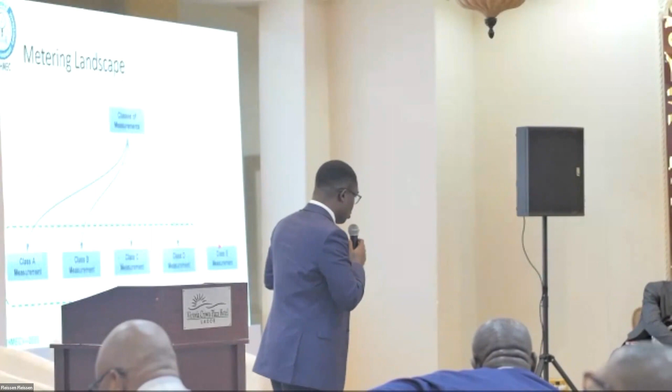Because the commission chief executive, when he goes out to meet a global audience, he will begin to talk about how we are reducing flare. But again, you also need to talk about the quality.

Again, at the presidency, maybe at the SGF, or we have our minister spoke earlier - okay, what is the quality? Because you have to talk about decarbonization. But again, what is the quality of emission that we are talking about?

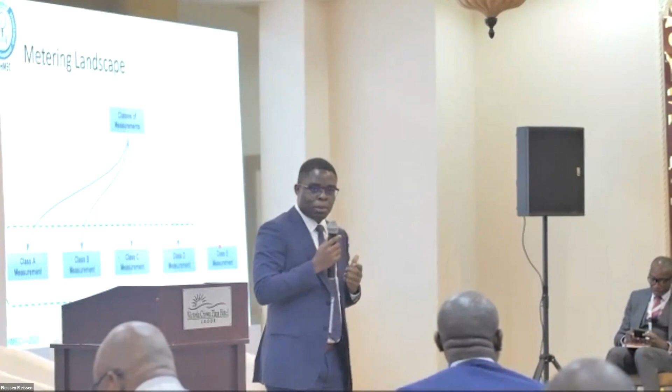So that when you are talking at the global stage, you'll be able to tell the people that look, we are taking accurate measurement and analysis of the flare that we measure, and this is the quality. Don't come and tell us we are not doing the right thing. We should have a voice to speak, but with data.

Next, please. Okay, this is a typical process flow diagram, and it shows the different measurement points. And this is for a gas condensate well, as an example.

The thing is that we have wellhead measurement, and that is multi-phase, in this case wet gas measurement. And then we have process measurement, process meters. Of course, down after stabilization and removal of water, dehydration and everything, you now have fiscal measurement, because you have

the quality of gas that is needed for export or for local consumption, what we call domestic gas, then that goes to power plant and everything. You must meet the quality, the specification. So next please, I will be fast.

But this is my experience. I've done flow measurement from wellhead to custody transfer, allocation, fiscal metering. So the question - there are different technologies when it comes to wellhead metering. But again, why wellhead metering?

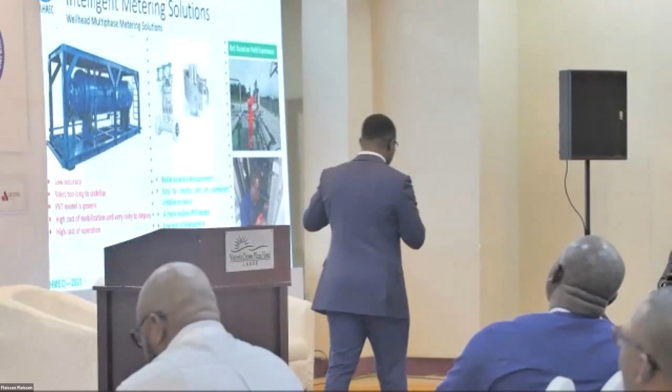Because we want to have so much data, and this is where digitization is, where we are driving digitization. We used to have separators for well testing, but it's very expensive, risky. It doesn't give you the right information about your well, the health of your well, or the productivity index at the end.

So, but you have an inline meter that gives you the three-phase measurement - gas, condensate, and water. So at every point in time, you have good information about the flow regimes, or you can predict, or you are seeing, because you have the trends that show how your gas is being produced. And at a certain point, okay, water is beginning to come into your well bore.

And then you should be able to plan for well workover operations and everything. So you have pretty good information and data about your well performance, as well as predict your reservoir depletion.

So in general, this is - I just want you to please press it again. Yeah, it should be a video.

Just picture that: under controlled environment, you will have this type of behavior. When you go to the field, what is happening at high pressure? That is why instrumentation is very necessary - smart instrumentation, a reliable one - because whatever data you are pulling to form the basis of your digital transformation is as a result of this information at the field. And if it is wrong, whatever you're saying is also wrong, and your reconciliation process is also already wrong.

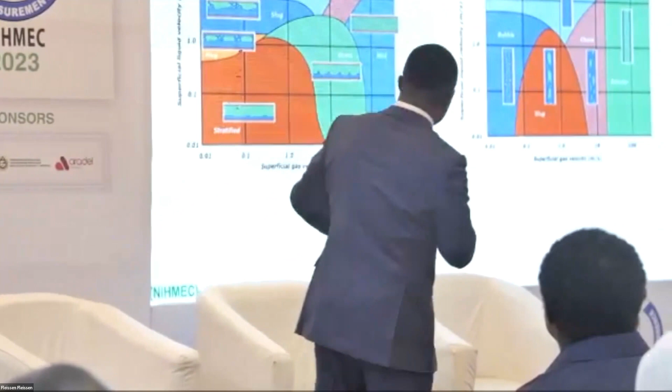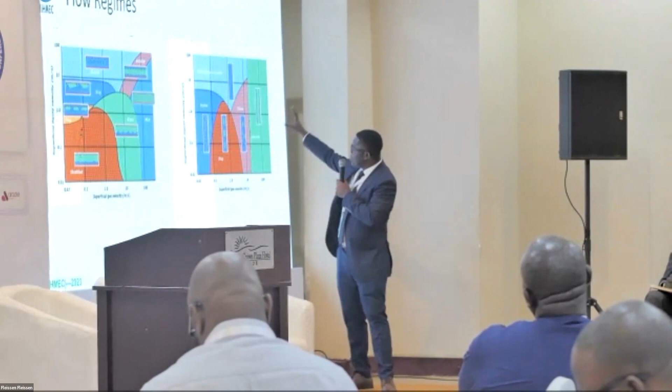Next please. So this is to show you the flow regimes, whether for horizontal and vertical flow environment. The truth of the matter is, for wet gas, you can only operate at this side of the envelope for horizontal, and for vertical you can operate at this side of the envelope. This side is slug flow, meaning either annular or mist flow. For slug flow and downward flow and everything, it is more suitable for traditional multi-phase meters. It is not for wet gas application.

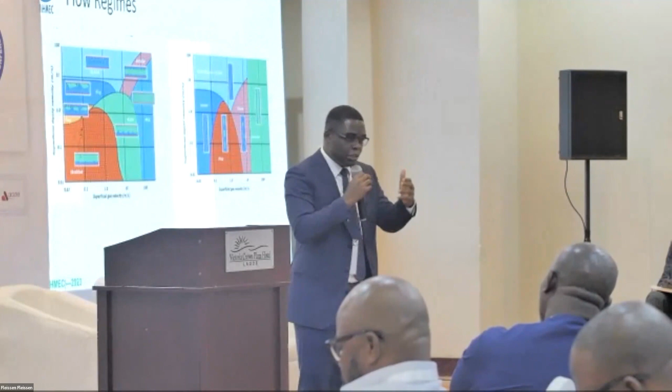As you further go down the production downstream, pressure and temperature variations occur, and then condensate comes out of the gas phase a little. That should form the basis of your mass balancing with accurate measurement. Next please, I'll be very fast.

Next. Generally, studies have been helping to the extent that we now know, if you're talking about wet gas metering, to properly unlock gas resources in the country, we have to look at it in 3 different types. That is based on an equation called the Lockhart-Martinelli parameter, and that parameter should at most be equal to 0.3. If it is greater than 0.3, it is a multi-phase flow regime, not for wet gas application.

And this is where regulation comes in. The question is, any multi-phase meter manufacturer can come and tell you, I can do wet gas metering - please, can your multi-phase meter withstand a Lockhart-Martinelli parameter of less than 0.3? If you have less than or equal to 0.02, it's categorized as type 1 because you have a very small amount of liquid.

That is why we talk about all these things process-wise. Sometimes we discuss and some people say, 'my well is dry.' I say, sorry, you don't have a dry well. There's no dry, okay, they say dry gas. I say, sorry, you don't have dry gas wells - it's the degree of wetness. There is still some amount of liquid, so it's still wet. But that affects your accounting processes downstream, and how you are able to take care of this matters a lot.

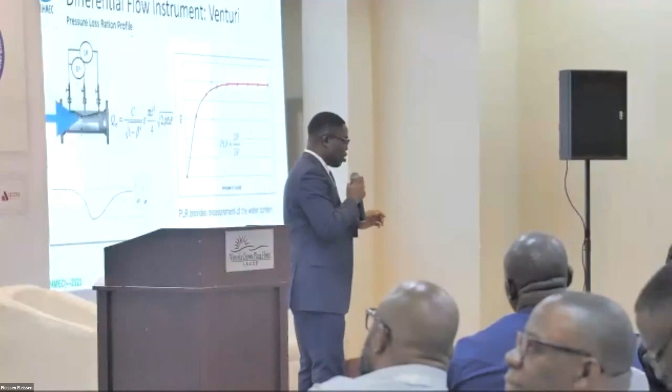So, I won't say what's the best, but there are different technologies. In my experience, it's the Venturi. And that's because a very experienced man called Rick de Leeuw from Shell, who is retired now, did a lot of extensive work using the Venturi to measure wet gas.

And he found, at some point, what we call pressure loss ratio, PLR. That's the differential pressure across a certain length of the Venturi divided by the differential pressure across the Venturi throat. The Venturi is designed such that when the differential pressure comes in at the throat, you have a DP, but when it is recovering, it doesn't recover fully in the pipe until a certain distance.

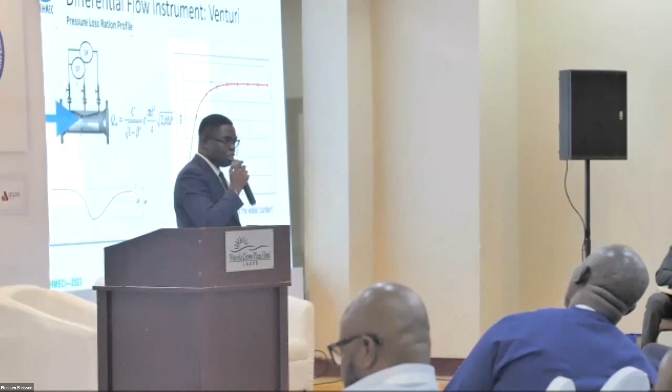So they studied it at different points to the extent that they now have a point where they noticed that the differential pressure across the Venturi, this PLR, will be able to indicate to you the amount of liquid in the flow stream. And that means the density—these are differential pressure flow instruments, same as orifice,

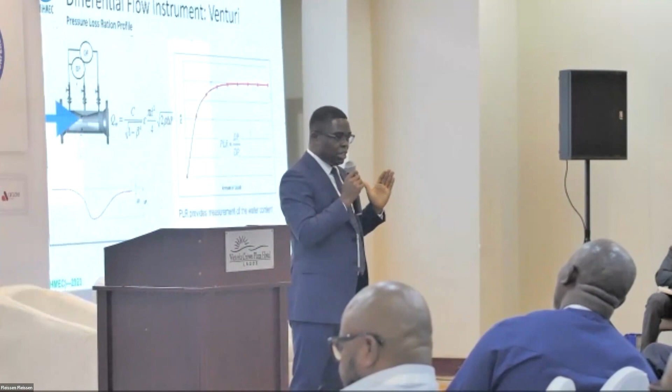but for single phase. So if you begin to load liquid in it, you'll find out that the gas becomes heavier in terms of density. So it means there will be an overreading on the DP because of the weight.

So the same simple differential pressure flow instrument equation is used, but they now have to use the PLR to get an indication of the liquid in the flow stream, so they can use that in the model, the advanced algorithm they've developed, to output the three-phase measurement as accurately as it should be.

So that's why smart instrumentation is key as we are building toward digitization, and it's very key to unlocking the gas resources that we have.

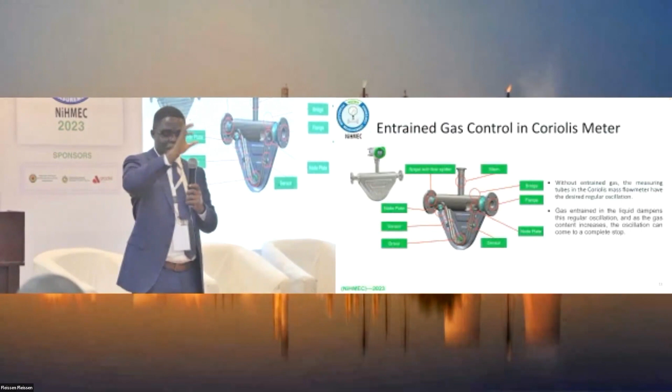Next, I'm going to talk about process measurement. In the process flow diagram we saw earlier, there are places where you have a slug catcher because you still have to stabilize a little bit of your well stream. In your slug catcher, you have your gas phase, gas leg, and then your liquid leg.

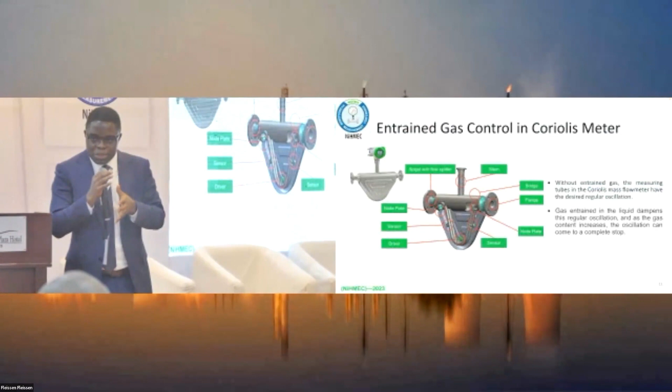Then you have to measure that volume too, because you're doing mass balancing, and this is where process mass balancing comes in. It's very important before you go for reconciliation, as I mentioned. In your liquid leg, it's condensate you have, and condensate is also a bit lighter compared to crude oil, so the density is also light.

But because you have a slug catcher, the retention time is very small for gas—it comes in, it goes out. If it's liquid, the retention time could be like 90 to 120 seconds based on design, and it can stay for a little while, so there will be a little bit of separation or stabilization that you'll enjoy.

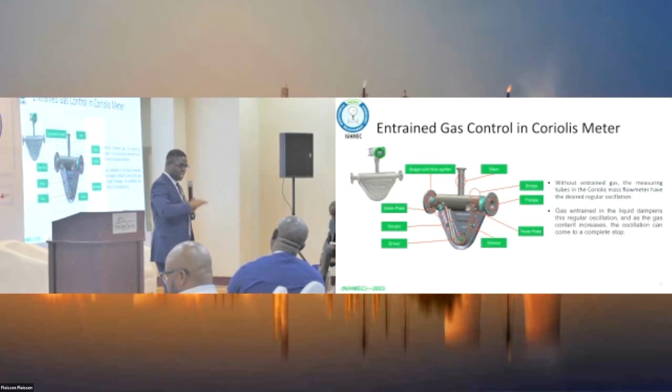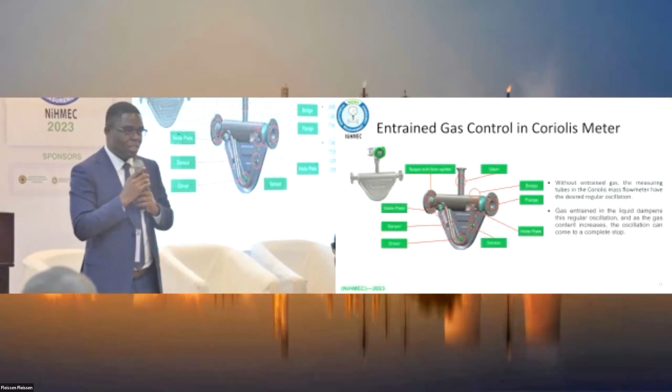But for gas, that's why a test separator is not really suitable for gas well testing—it comes in, there's no stabilization, it goes out, and sometimes it comes with bubbles in the separator, in the gas leg or liquid leg, but you still have to measure it. What technology are you using? Most efficient is Coriolis. The question is whether gas bubbles or entrained gas affects the measurement of Coriolis. But advanced research has also improved measurement using Coriolis meters, and that's why it's very important—what we're talking about today is having smart instrumentation for digital improvement.

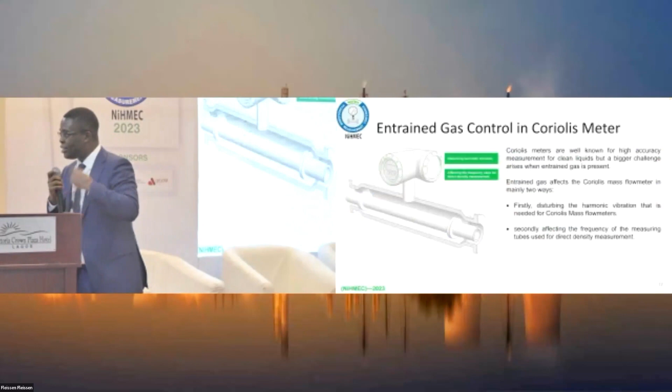This is the conventional Coriolis meter technology, where you have your sensor and then you have the driver. The sensor and the driver are connected in one block directly for a traditional Coriolis flow meter.

So whatever the phase shift or the frequency of movement is, it translates directly into the driver. If gas bubbles come and distort the frequency and oscillation, it feeds directly into the driver, and that gives the measurement output of a Coriolis flow meter wrong when there is entrained gas.

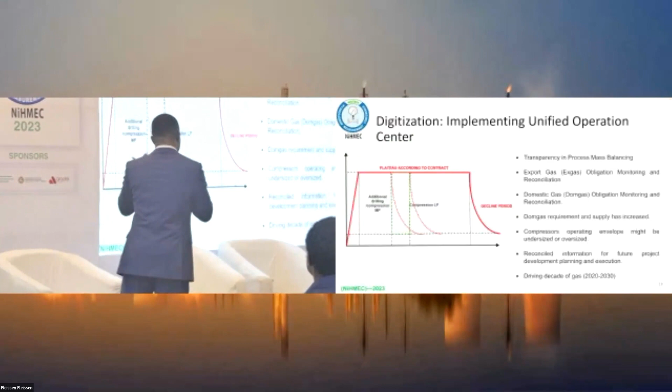Now, in this case, you find out that you have the transmitter digitally connected on a digital processor.

So what happens is that the conditioning of that phase shift, of that impairment because of entrained gas, is processed and dampened in the electronics, and is not transmitted to the driver. So the resolution happens internally in the transmitter before it goes further. I would have explained it much better, but because of time.

So it's not directly coupled to the driver.

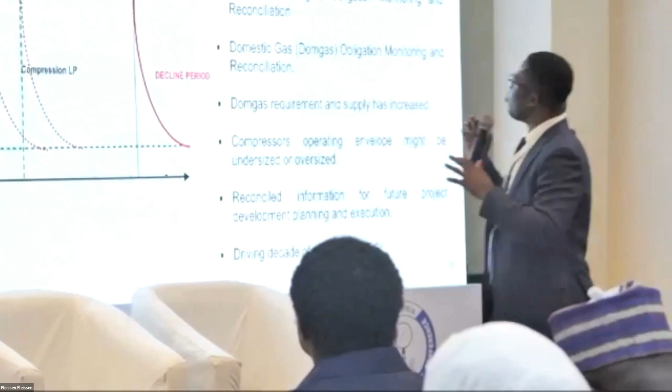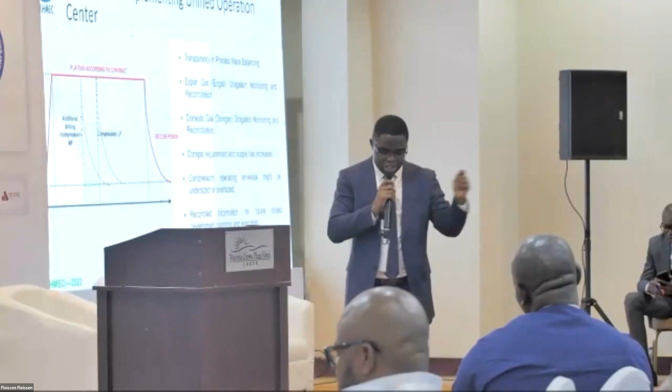So digitization, why do we need to implement that? I want you to look at this. This is a typical production envelope from startup to when you're at plateau. But the thing is, we need to understand that every gas production is tied to a contract. Either you are supplying to export or you are meeting your domestic obligation. It then means that the compressor you size should be able to handle that. The question is, for how long?

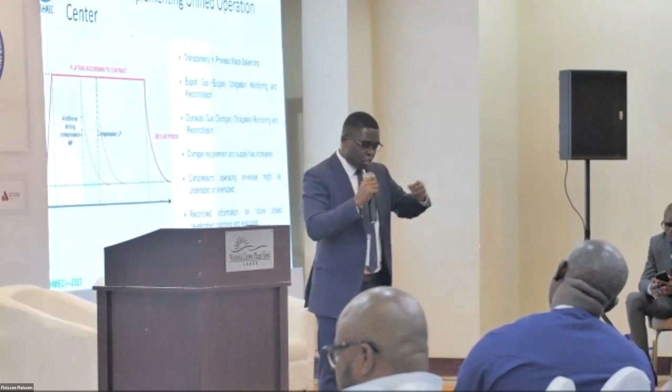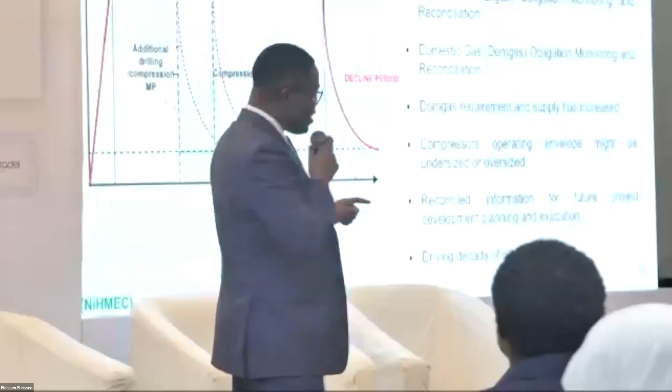Because your choke opening at the wellhead is dependent on the demand from your downstream customers. So if the demand is high, you also have to open your choke because you need to meet the contractual obligation. It means that for gas wells, the plateau is very short. And the commission chief executive spoke about those who are not able to meet their field development, they will be delicensed and reissued to others.

The question now is, what is stopping you from producing that? Because some of them want to discover other gas fields so that they will be able to have enough compression capacity. So if you have one, two, three wells, you might not want to put in a compressor because it's not economical for you. But again, we need to discuss how we can now do fiscal allocation from the wellhead to maybe a third party.

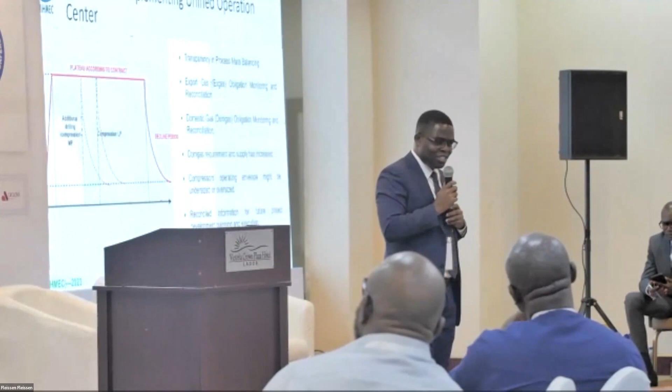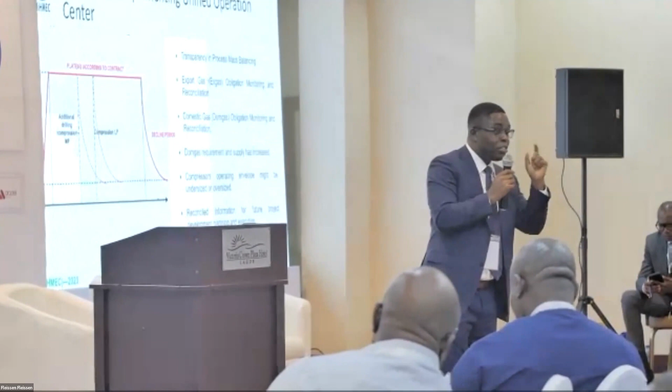You have to deplete that gas well because we want to harness our gas resources. That means you can actually use a multi-phase meter or wet gas meter to produce at the wellhead and send to a third-party processing facility at an agreed accuracy rate, where revenue is tied to the gas phase, not the condensate phase or the water, because those are small. So this is the question.

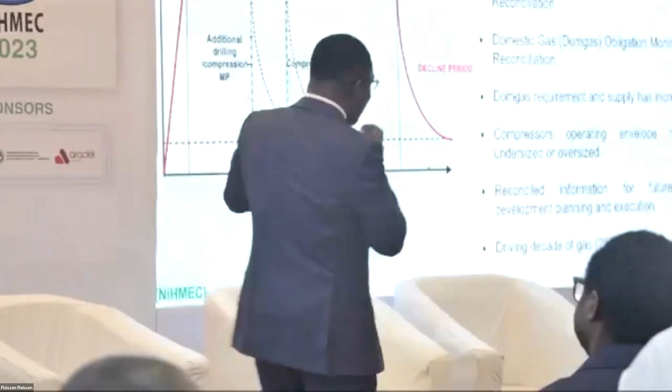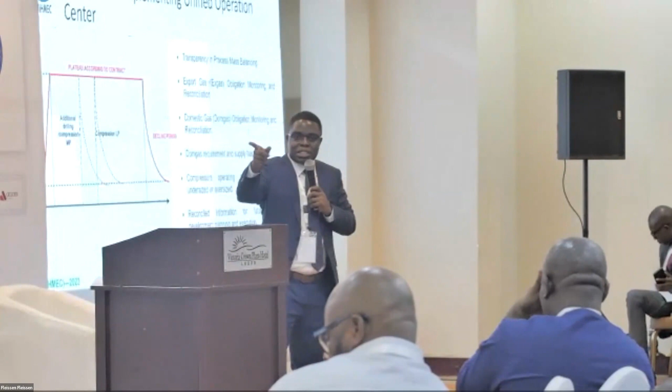This is why we are talking about technology, because at the end of the day, this builds up to the commission having a remote monitoring and command center, because they will have to gather all this data. They have to be seeing it. Before you come and petition somebody, they already have the data and they are waiting for you. So when you come and say, I want to petition Mr. A or Mr. B, they have substantial information to be able to ask you questions.

At such and such a time, your wells were down, or your wells were producing at this rate. How come you say you're producing more than Mr. B? So they have to ask questions because the trending and the information are already there for them to see. And this is where we are going.

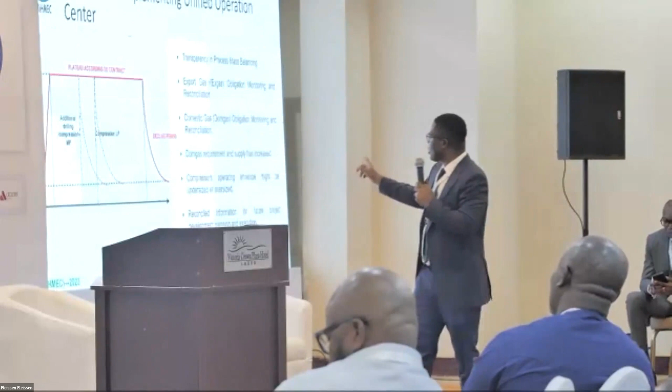So you see, it's just building from the field instrumentation. This architecture is very necessary, leading to the controls, and then to the application and software where you'll be able to have a dashboard to quantify which well is producing well or better, and which asset is getting more than the other.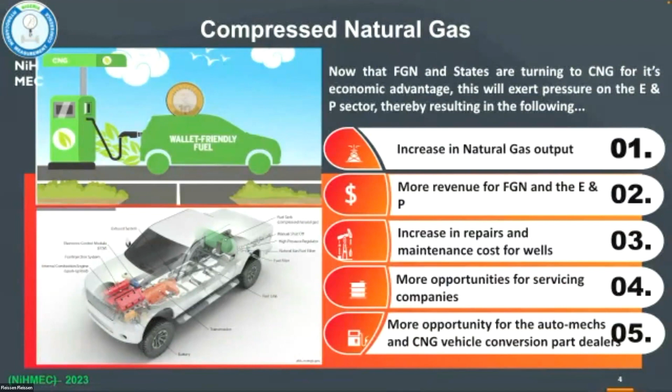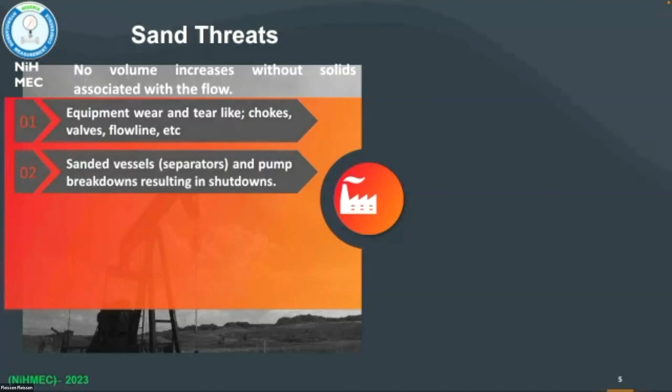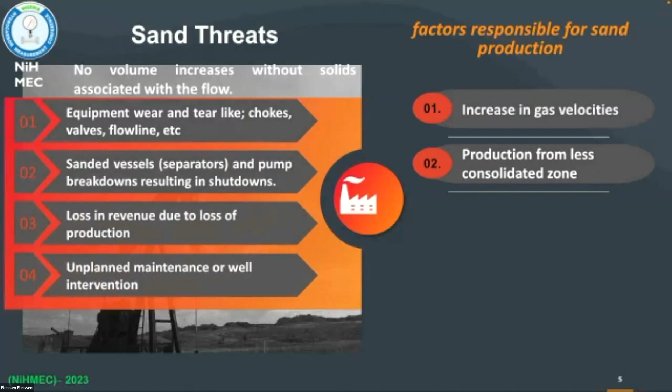Next. So there's no way you increase volume without associated solids, which will lead to equipment wear and tear - your chokes are going to wear out, your valves, flow lines, everything, you'll have your vessel sanded up as you continue to flow. Then, of course, when sand comes, you lose revenue because you lose production, and then you begin to have unplanned maintenance.

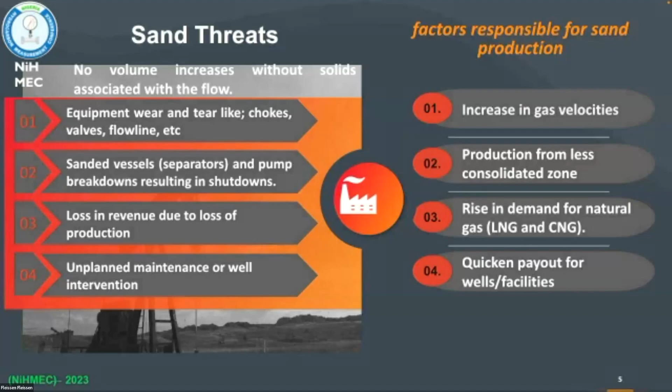Next. So these are the factors responsible for sand production. One, increase in gas velocities - you can't overlook that. Number two, we produce from less consolidated reservoirs, so definitely you cannot do without sand. It's as simple as that. A lot of people overlook it, but you cannot do without producing the sand. Then, rise in demand for natural gas, LNG and CNG will lead to that. Then again, we also have this issue of quickened payout time, because a lot of companies will want to say, okay, now that we have the opportunity, let's see how we can make quick money. So the temptation to make quick money can be disastrous.

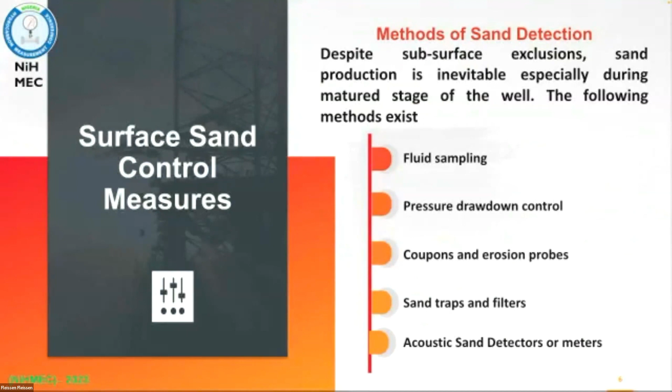Okay, so we also have the acoustic sand detectors or meters, and that is what I'll be talking about. So in this case, we're looking at a meter, which is an acoustic device that can measure sand. This is how it's installed on the flow line. They are real-time, non-intrusive, installed on an elbow, downstream. They can come in form of portable or permanent devices that can be installed and integrated into your SCADA system - we're talking about automation here, so you can have that.

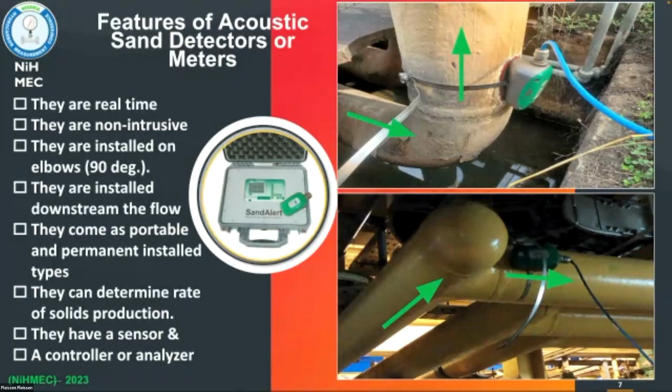So move to the next. If you see the picture here, you can actually have values flowing on a screen like this, and you can actually see what you are producing.

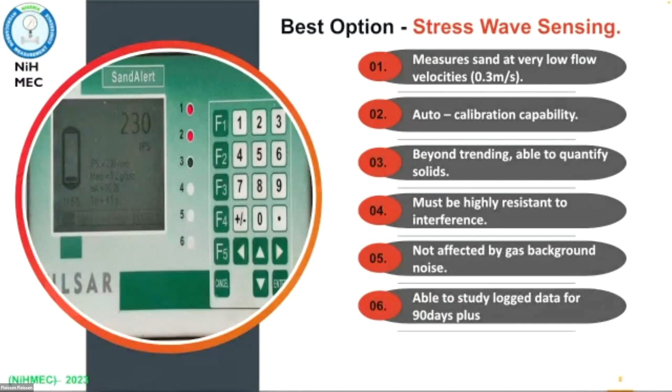There are several technologies out there, still talking about acoustic sand detectors, but we've found stress wave sensing actually doing better than others. It is based on that, so you can have measurements. In fact, even with a flow velocity of 0.3 meter per second, it will still pick.

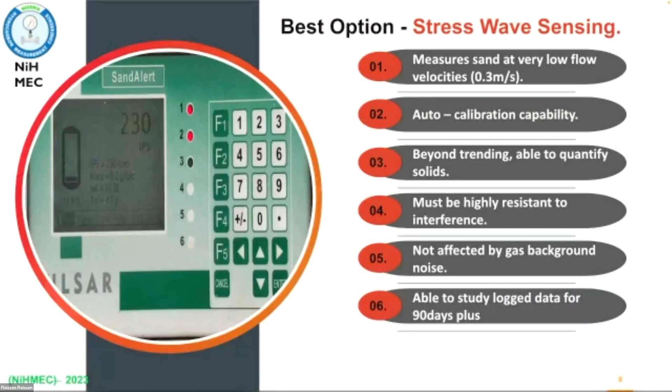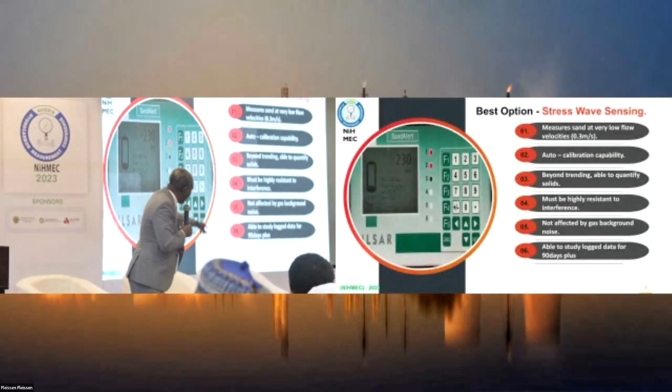This type is auto-calibrated. It self-calibrates itself, so you don't need to go into the rigors of trying to calibrate all the time. And then it goes beyond trending and is able to quantify your solids for you. It's resistant to interference, not affected by background noise like others are, and it's able to store log data for 90 days or more.

And then it's suitable for multi-phase flow. So whether it's gas, whether it's oil, whether it's water, whether it's wet gas, whatever it is, it doesn't care.

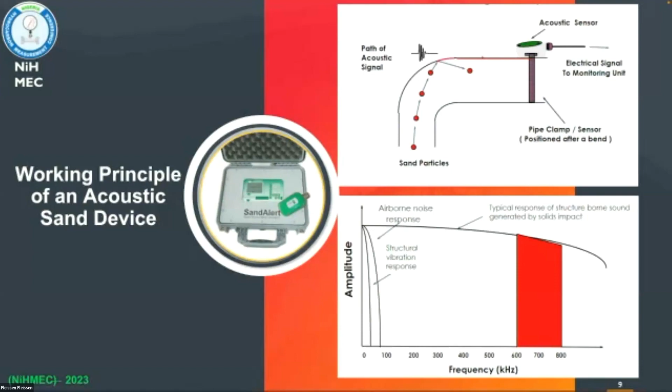Then, of course, those who are in instrumentation, or mechatronics as you call them, were able to say okay, there is a narrow bandwidth that this is operating with. That makes it able to get the frequency of the sound that is made inside the flow line. It picks it up and is able to distinguish it very well.

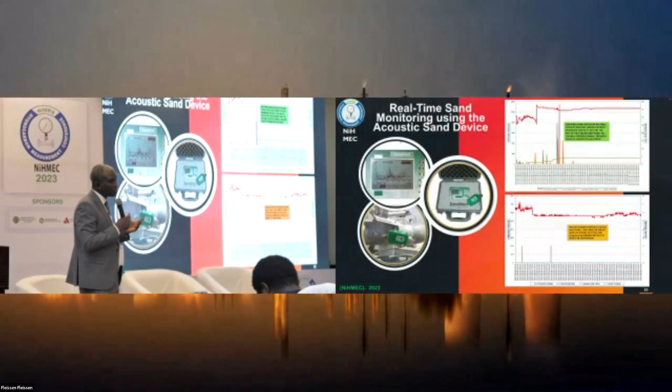All right, let's move to the next one. You can actually present your data graphically as well, because as you have them, you can download the data, plot a graph, check the trend, see what is happening actually to your well, and be able to predict what happens with your reservoir.

And then this is the units of measurement. So go back. And then the equipment, go back, sir. Okay, so you have this. This is the device unit of measurement. You have impact per second, which gives you the trend, grams per second rate, and then you have grams in weight. And then the screen you're seeing there is actually the screen it comes with, so you can see that right on top of your controller.

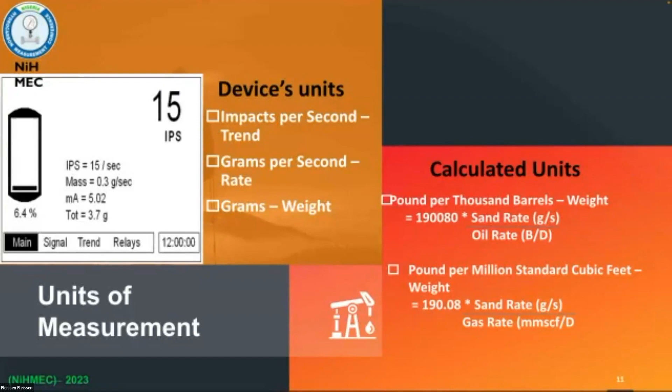And then we also have these calculated units, because the devices don't come with our traditional field units in pounds per 1,000 barrels or pounds per million standard cubic feet. So in 2005 I actually got a conversion factor, published it in SPE 2005, and then we use that to get our measurement in pounds per 1,000 barrels for the client anytime you want your figures in pounds per 1,000 barrels.

So go to the next one. Now this is a case study. Operator not mentioned, but it was actually a sand-prone gas well producing lots of water and condensate. But because of theft and all of that, the operator didn't have where to store the condensate, because you cannot push the condensate to your export lines, it will be tapped. And when you try to do that, maybe Shell or whosoever owns the trunk line will say please, you better shut in. But then the gas was needed, so we were called in to handle a situation like this.

Before then, the wellhead pressure was about 1,539 PSI, and the gas rate was like 35 million standard cubic feet, but it was making 297 barrels of water per day and 439 barrels of condensate. Now, there was no sand data then, but the operator wanted to see how to optimize the well, though fearing what would happen if they started making sand. So we had to go in, and by the time everything ended, they were able to actually control the well and reduce the gas level to 33 million standard cubic feet, while the water rate dropped from about 290 something to 85.

And then the gas condensate rate increased somehow. At that point, they needed the condensates. Something had happened, and then they were comfortable producing. We were also able to get the sand production for that period, an average of 0.4 grams. That actually increased the confidence level of the operator. He now knows he can produce this gas well without the fear of producing sand.

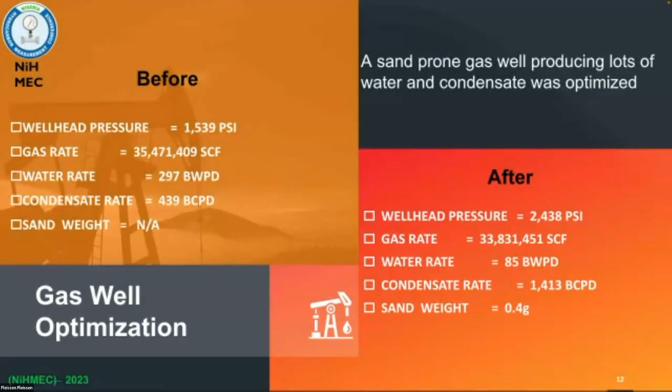When it comes to acoustic sand detection, the API RP14E document covers it, based on erosional velocity. But there are some parameters that were not considered - flow geometry, sand size in microns, sand composition, the Reynolds number, or pipe roughness. What they considered in that document was basically the flow velocity. Almost everyone trying to bring up sand monitoring equipment based on acoustics wants to refer to this document.

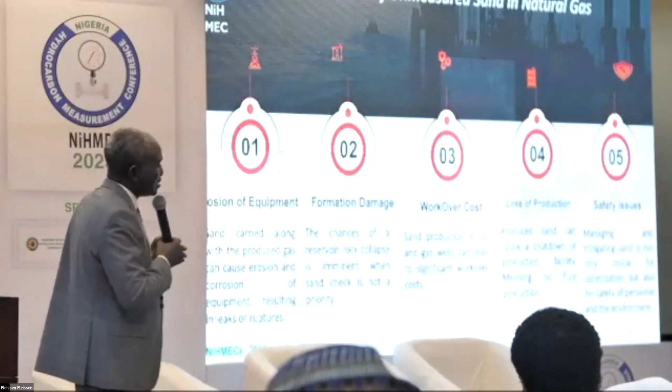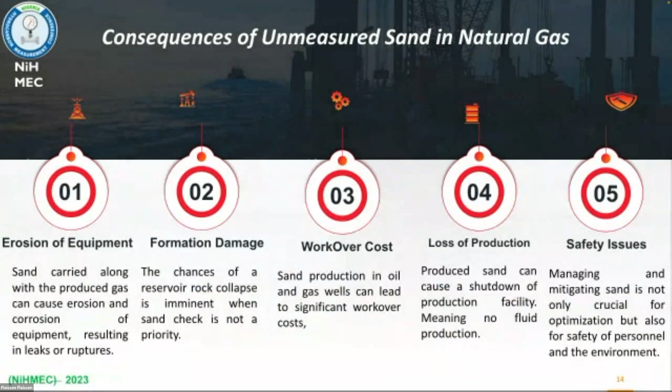So what are the consequences when we do not measure sand in our natural gas wells? Erosion of equipment, formation damage, workover cost, loss of production, safety issues. We all know that, I don't need to break it down anymore.

So my conclusion is like an appeal. Yes, it's an appeal. The regulators were being hit right, left, and center, but I don't want to hit you. No, I'm too small, I'm too small to do so.

But the truth is, sand measurement is serious business, obviously. It's serious business, especially now that we are getting into gas optimization. We're trying to unlock our gas wells. Those who had before now locked up their wells were not ready to sell, not ready to produce. Now the market is opening up, and since it is a big business coming our way, we want the operators to pay attention to best practices.

There's no way you will flow even your oil wells without paying attention to sand production. Why are we even talking about metering here? Going once in a while to collect a sample from the wellhead and analyze it does not give you the full picture of what your wells are producing.

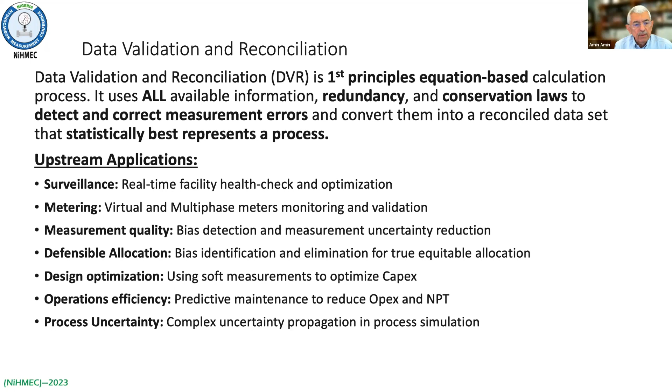It does design optimization to reduce CapEx, operation efficiency improvements to reduce OpEx and non-productive time, and leads to process uncertainty reduction, plus uncertainty propagation to estimate the uncertainty of the outcome of your measurements. Overall, it is really a physics-based digital twin of any production chain from pore to process, applicable to wellbores, surface facilities, and more, integrating all that data, as we will see in the case example.

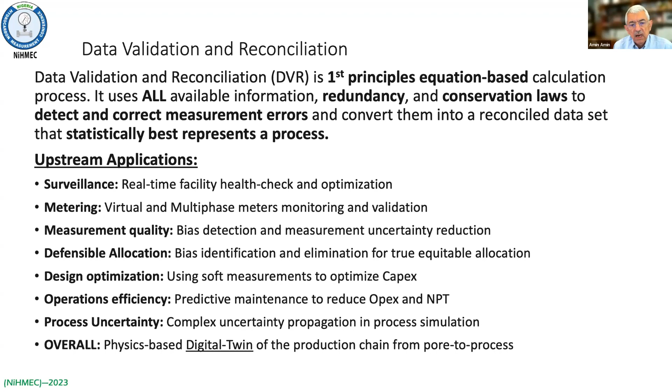Often bias is hard to detect and can change or drift with time completely unnoticed. Any process is often impacted by the combination of measurement precision and bias, primarily bias. What if your sensors are drifting and you don't know they are? That's where this technology or methodology can help detect these kinds of biases.

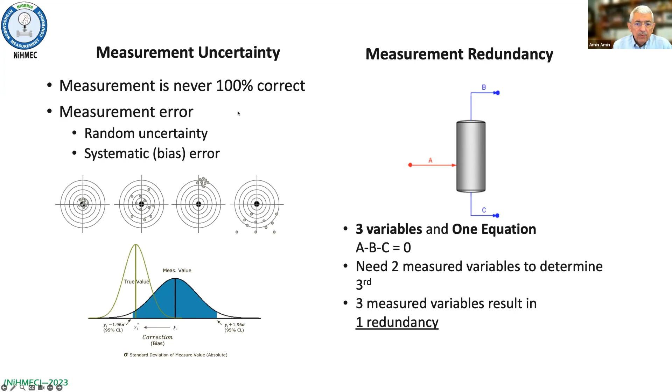With this, I would like to illustrate how this is done compared to a conventional modeling that's using straightforward process simulation. Let's start by quickly describing what a process simulator is and compare it with the DVR.

So basically, we have some sort of a one-way calculation that takes the measurements, the models of calculation, does the calculations, provides the outputs, and you have now a projected calculation for the variables that are either measured or unmeasured. In a typical process simulation workflow like this one, the model uses a limited set of measurements, because we basically use the measurements at the input and the equations to calculate what goes at the output.

The calculations also are done in a deterministic fashion without accounting for measurement uncertainties. So if the measurements have errors in them, really we only take the measurements at face value, and we do not care too much, when we do the simulation, as to what level of uncertainty or expected uncertainty is around a given measurement. Plus, the raw measurements are used without consideration of potential inaccuracies that can be due to measurement bias.

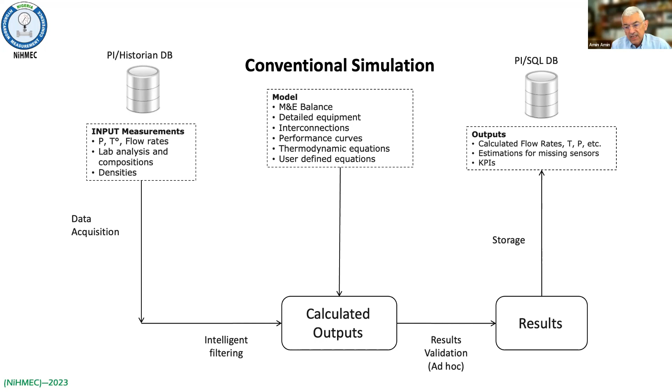So basically for each measurement, what we do in this loop is we take the measurements before we do any calculation to the end point.

We perform a convergence or an optimization of what we call an objective function by making automatic small changes to each of the input and output measurements, all the measurements in the system, until the reconciled value of these measurements satisfy the set of equations and physical principles derived or described in that process.

With this loop converging, we have a new set of values for each measurement that we call the reconciled values. To the extent that these reconciled values are close to the original measurements, we do not have a bias, or we have pretty much a matching process.

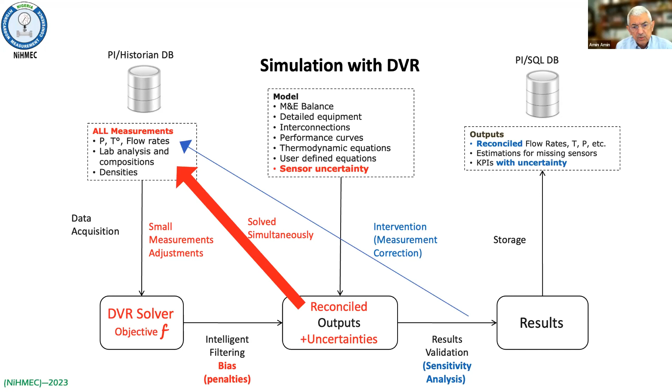Once this is corrected, because you cannot really calculate things with biased or incorrect information, you would correct the information and then perform the same iterative process to arrive at a set of reconciled values that are much more representative than the original raw measurements you started with. That's really the beauty of DVR: it does not take anything for granted, it basically self-checks the health of the measurement and the process and the relations between these measurements before it proceeds with giving you the final representation of that process.

These 4 wells go into a header that is tested by a multi-phase flow meter, and each of the wells is sequentially passed through the meter to be tested. The production of these wells is put back into the production header, into a separator to take off the water and inject it into the injection well. The gas and oil, the hydrocarbon, is pumped into that 17 kilometer pipeline all the way to the final separation and sales facility, where compression of gas takes place and separation of oil is done, with gas in solution coming out, separated, put in the gas line, and then the final physical measurement of the gas and oil.

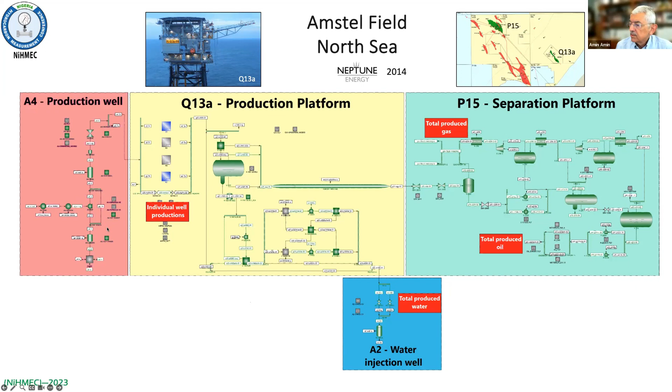Absolutely. So with your attention to each of the wells, we're incorporating the measurement of each of the components of that well, from the inflow performance to the pump to the tubing performance to the choke, with each of them giving us information about the flow rate in that particular well.

The DVR process takes all this different information and consolidates it into one single optimized flow rate. That's a virtual flow metering done through the DVR process, to give you an estimate of what that flow rate is as it compares to the multi-phase flow meter.

So that's a concept of using DVR for metering, and to validate and compare measurements from different sources with the actual physical measurement from the multi-phase flow meter. So this is a validation process.

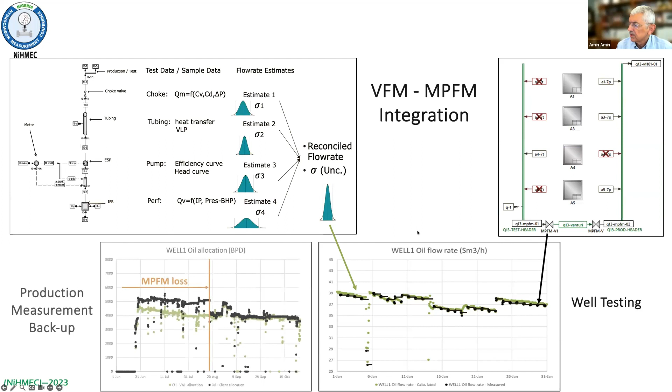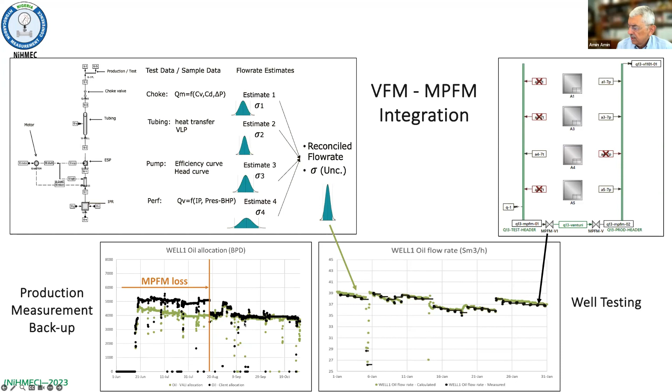In one case, the meter was off track and there was a problem with it. The validation continued to perform as it should from other measurement sources. And we see that when the meter was put back in operation, these measurements were aligned.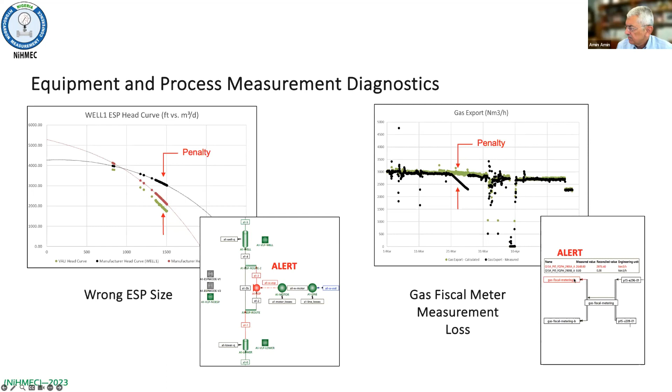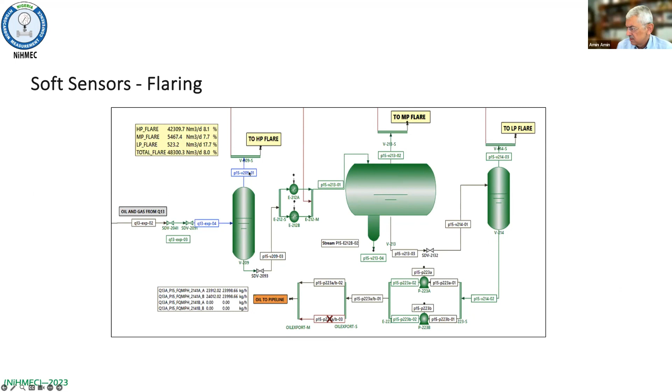Similarly, flaring, that would be a soft sensing. The model by itself can minimize the requirements for actual physical meters that could be costly, by using all the information of the process to give you a good estimate, for example, for the flaring on that particular platform.

That said, the implementation of the system is pretty much in the form of the engine being implemented on one of the servers, interacting with different databases to collect real-time data, perform the processing reconciliation, and then put back that reconciled, more trusted values into the reporting system for further archiving or use for decision-making by the actual customers. So that's basically a self-contained system within a given process.

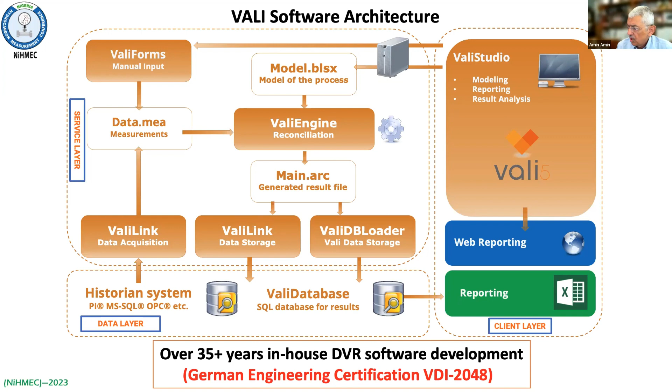The whole thing is not new. It is in development over the past 35 years, with the certification of the actual calculation optimization based on a standard from the German engineering certification VDI 2048.

With this, let me remind ourselves of the use of DVR for that integration as I started with. So what I talked about today is an introduction of DVR methodology in upstream, to enable upstream data integration through surveillance and real-time monitoring for allocation, virtual flow metering, MPFM validation, for early detection in particular of biases, for predictive intervention using the concept of penalty of measurements, and basically also to perform design optimization by minimizing the requirement for physical measurements where that can be done.

Use it also for economical multi-phase measurement solutions, to give you a live model-based digital twin of your process that continuously monitors the process and gives you predictive information for action, and gives you finally confidence in decision-making using trusted data that is not corrupted by biases or errors as the raw data may be.

Thank you for your attention, and if there are any questions, if time permits, I'm happy to answer now or answer it at a later time.